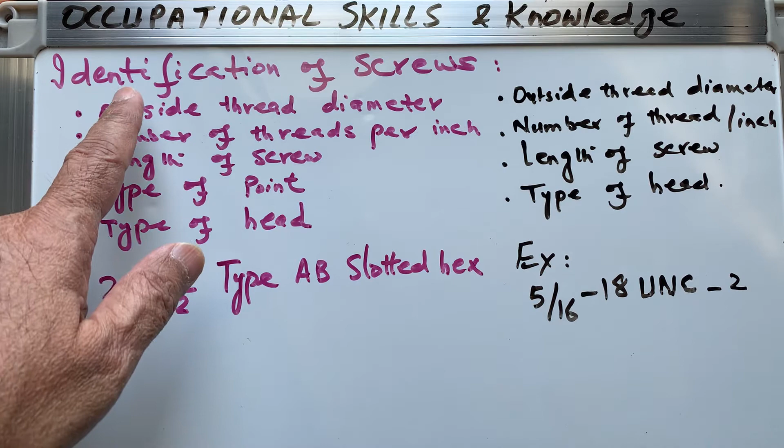On the board I have written something: identification of screws. We will learn how sometimes we have a number written one way, or sometimes another way. What does it mean if it is written for the screw or machine screw like this? The technician should know what we are talking about. So we will learn this in this video.

Briefly, a fastener can be categorized as a wood screw, sheet metal screw, or by steel, stainless steel or brass, depending upon the type or composition of the material used. The unit of measurement is also important in the screw system or nut and bolt system. Sometimes we say standard screw or standard nut and bolt, meaning the size of the threads is measured in inches. When we say metric, the threads are measured in millimeters. So there are two systems of measurement: standard in inches, metric in millimeters.

It also depends on the function of the fastener - nut, bolt, washer, or spring washer - which we use all the time in machine assembly. Then there's application, meaning how we are using it - whether it's self-tapping or a machine screw. The diameter of the thread is also an important component in classification. What is the diameter of the thread?

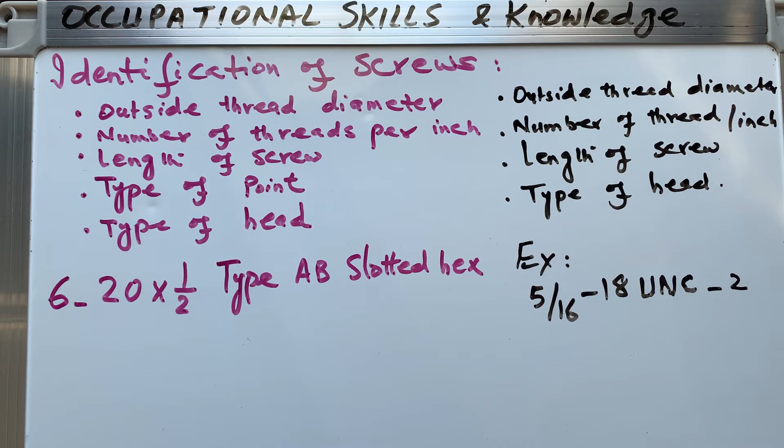Therefore, it is a wood screw. Then there could be a flat head screw, round head screw, oval head screw.

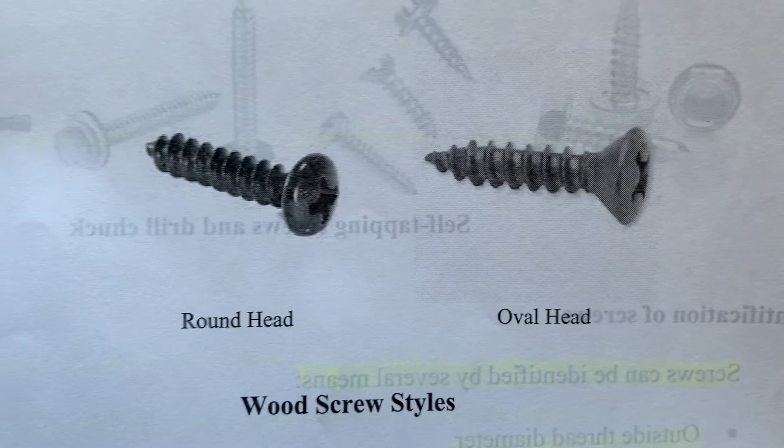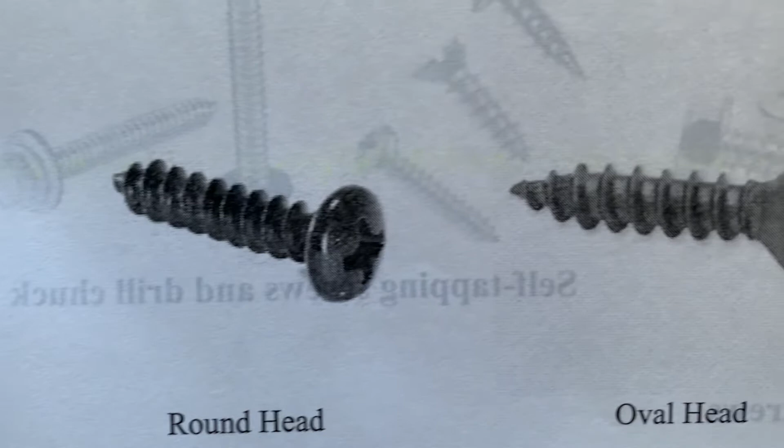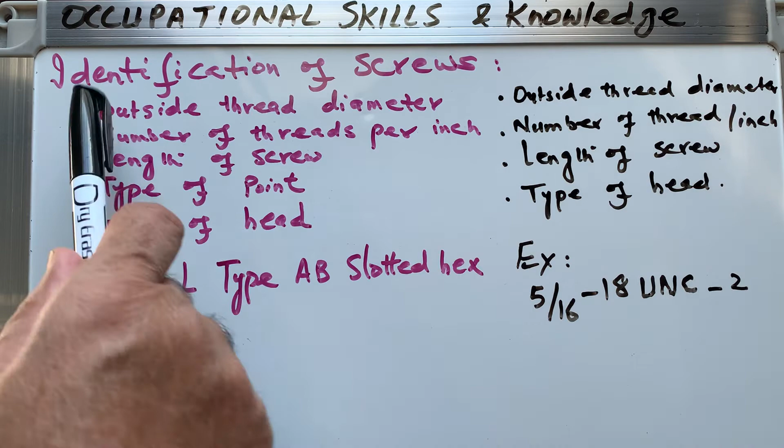Then there's a self-tapping or tapping screw. So you can see we have this tapping screw, right? Such kind of things, when you go on job or to the workplace, you will come across these settings or these numbers. So you should know what type of thread we are using, what type of nut and bolt system we are using. Now we come to the topic of identification of screws, how to identify them.

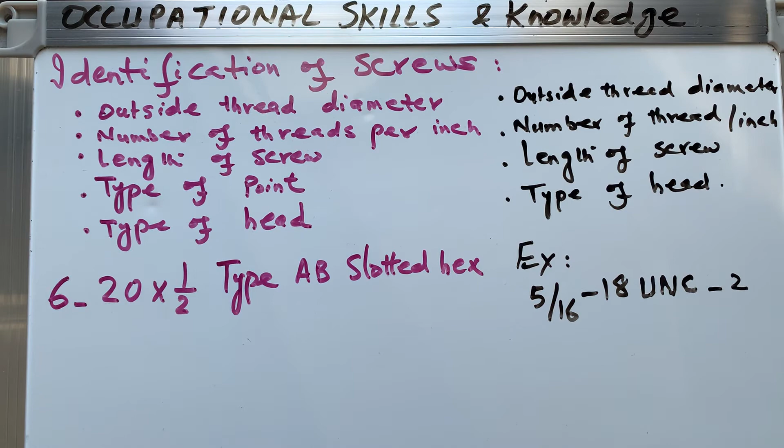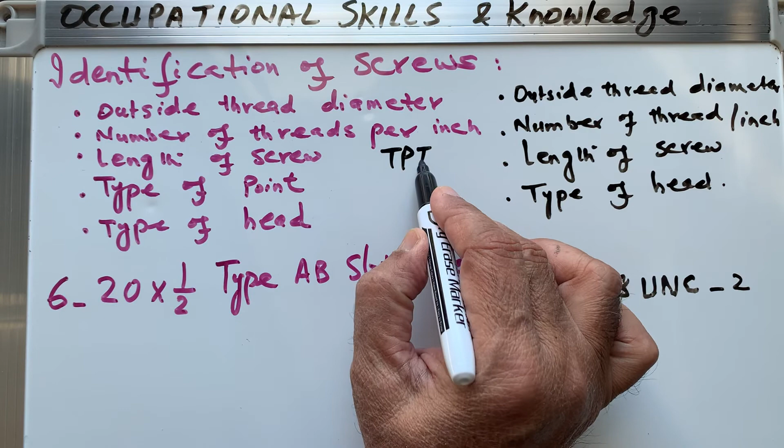So we have here a few bullets. Outside thread diameter, we should know that. Number of threads per inch, that's important, TPI, sometimes abbreviated, threads per inch. Then length of the screw, that is also defined. Type of the point, what type of point it has, the tip. And type of the head, what type of head it has.

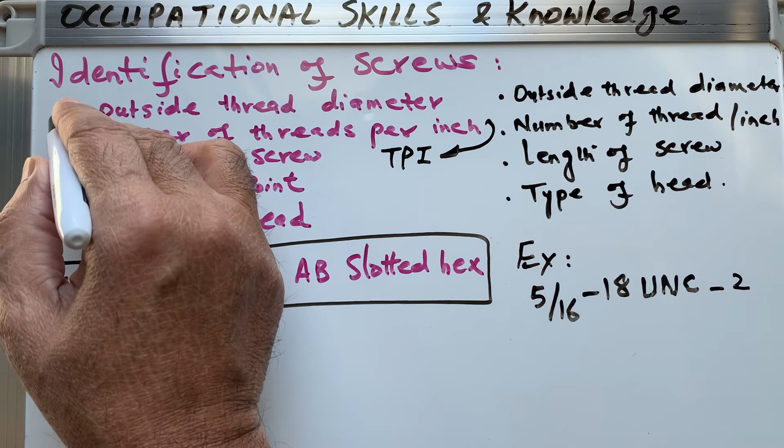So if something is written like this, every number has its significance. What is 6? 6 is the outside thread diameter. This 1 is outside thread diameter, which is 6 millimeter. But in inches it doesn't say so, so you must be aware of these important conversions, which is 0.138 inch for 6 millimeter outside thread diameter.

Number of threads per inch, this is important, this is number 2 here. So you have to remember what each number signifies. This is outside diameter, this is number of threads per inch (TPI), this is length of the screw. Then we have type of the point, AB point, and type of the head, which may be slotted, square, or whatever head it has.

So we say the same thing. But here you can see many machine screws can be identified as outside thread diameter, number of threads per inch, length of the screw, and type of the head. Only 4 things, right? Now the example is something like this.

5/16-18 UNC-2. So what does it mean? Everything is significant. 5/16 is, same as before, the outside thread diameter, but this time it is in inches. We learned there are 2 systems, one is standard and one is metric. When we talk standard, we mean the inch system, and when we talk metric, we mean the millimeter system. So 5/16 inch is the outside diameter.

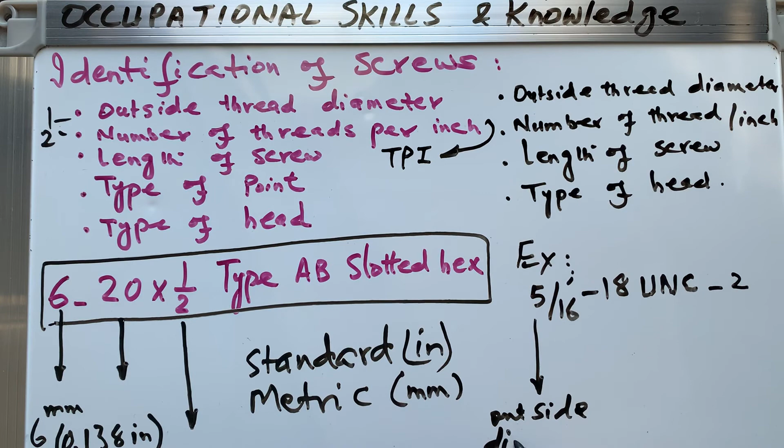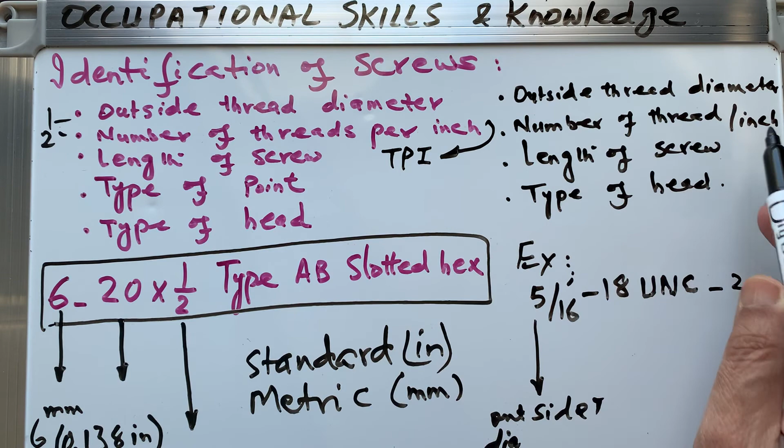Outside diameter, thread diameter you can say, outside thread diameter. So what is 18? 18 is the number of threads per inch. This is threads per inch, TPI.

UNC is Unified National Coarse. What type of thread it has? C for coarse. And 2 is the class of fit. This means the amount of play between the internal and external thread, called class of fit, the clearance between the two.

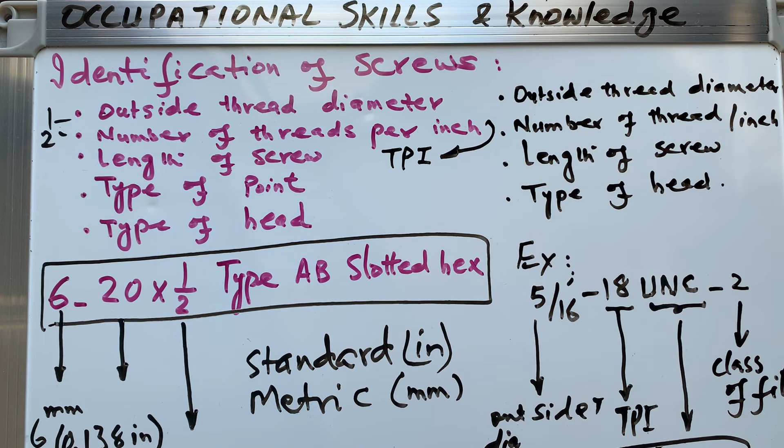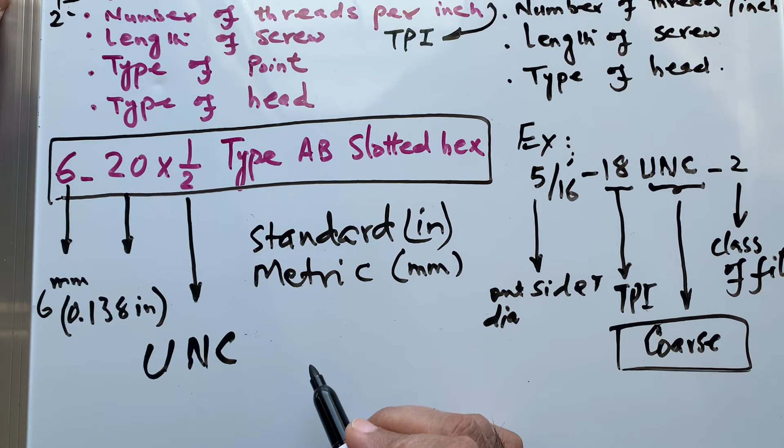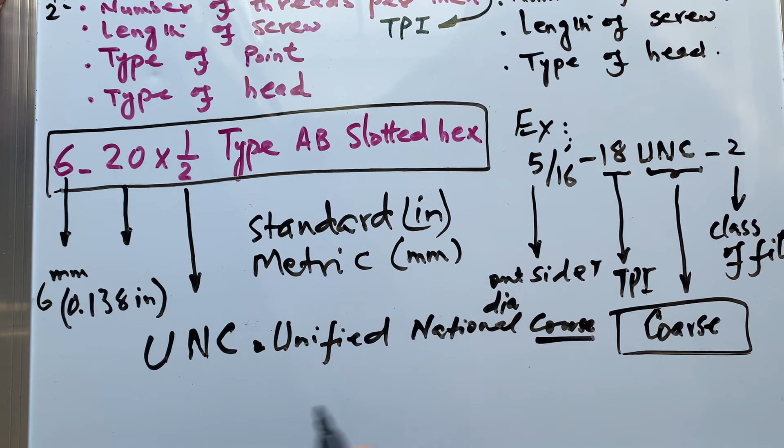I will emphasize now on coarse and fine. So if we use the word UNC, that is Unified National Coarse. Coarse means a thick thread. UNF, if it is written UNF, that is Unified National Fine, meaning fine threaded.

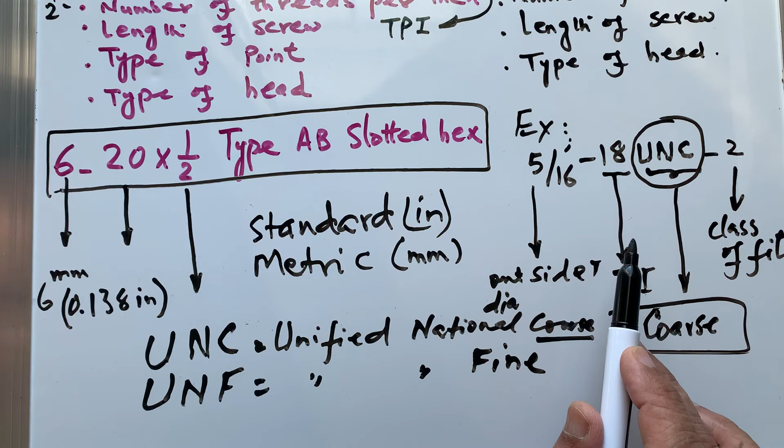So we classify this as UNC or UNF, regarding machine screw type. Sometimes we write this, sometimes we write that—one is the millimeter system, one is the inch system. Hope you can identify when you go to the field: if something is written like this, you know what it's talking about. The first digit is outside thread diameter, then number of threads per inch, length of the screw (which is important), and type of the head.